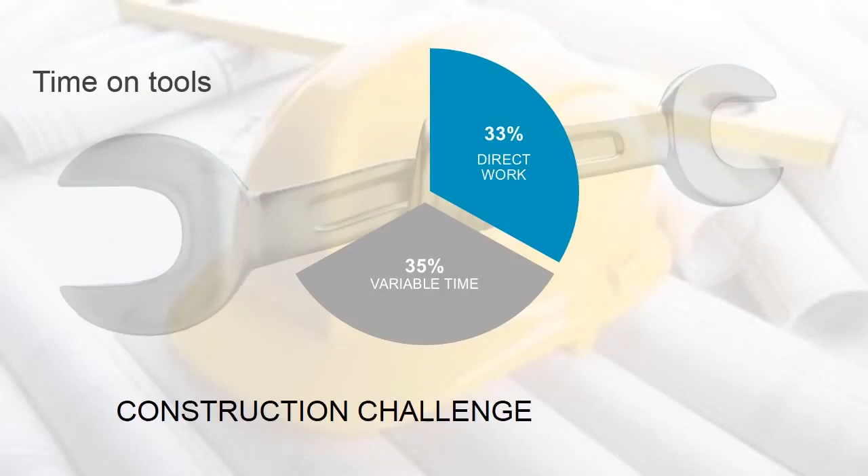Another third of the time is called variable time. Variable time is the time spent getting safety permits and training, moving material around, break times, and logistics to and from the job. Variable time may change from job to job or client to client. Disturbingly, another approximate third of all construction personnel time is spent idle and waiting. Constructors want to know how they can improve and shorten project schedules and turn idle time into profit.

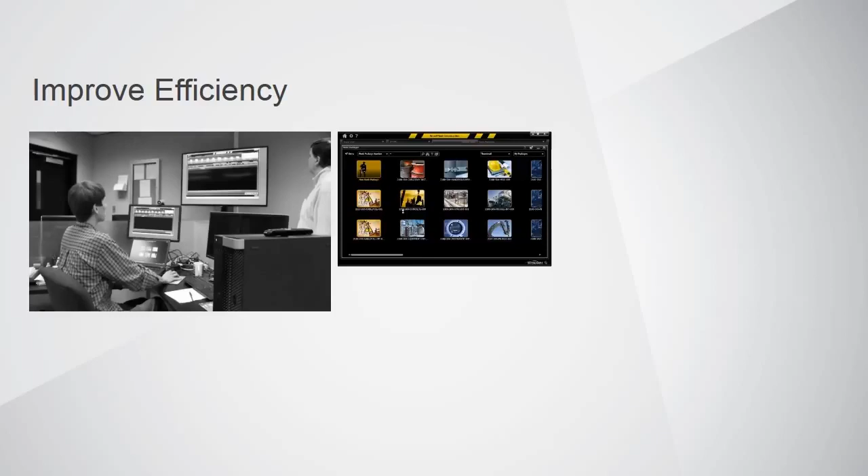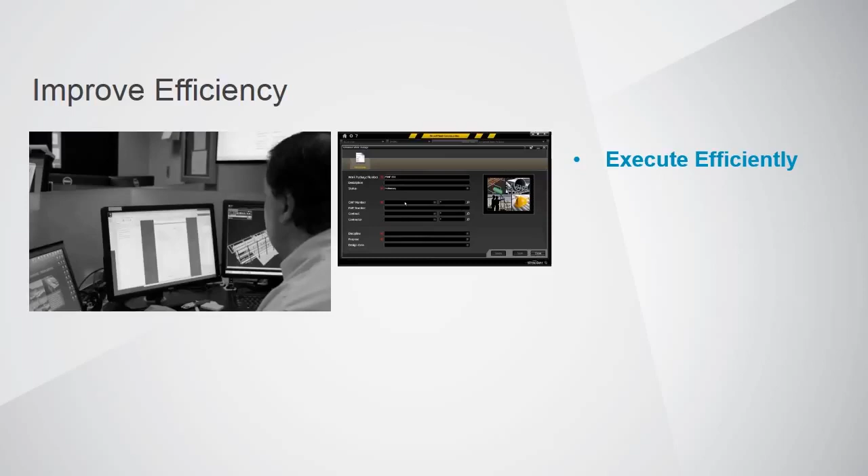Intergraph has been working with many constructors around the world to get a view of what it takes to improve efficiency of execution. Executives tell us they need to execute efficiently day to day. In order to execute efficiently, the work crew needs to have information, materials, tools, and resources in the right place at the right time. Without that basic capability, efficiency is extremely difficult to improve.

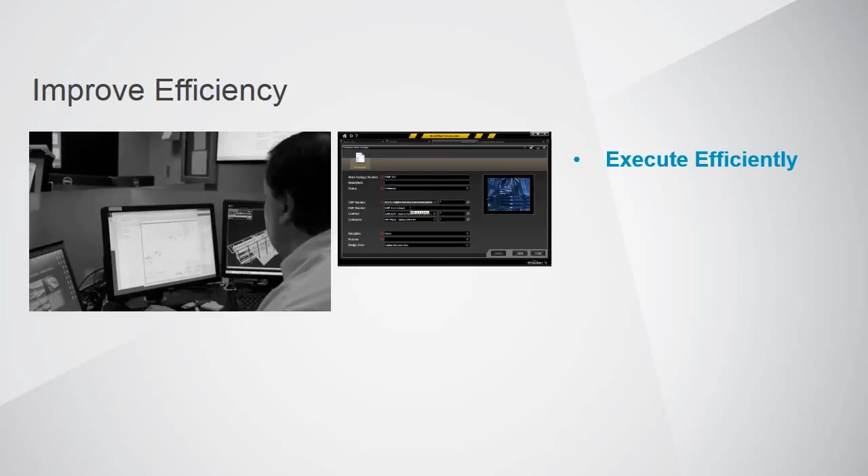Things happen in construction. Materials don't arrive, materials are mislabeled, equipment breaks down, and employees don't show. It's imperative that the on-site crews be able to dynamically optimize to make sure they're making the best use of resources available to reduce idle and wait time.

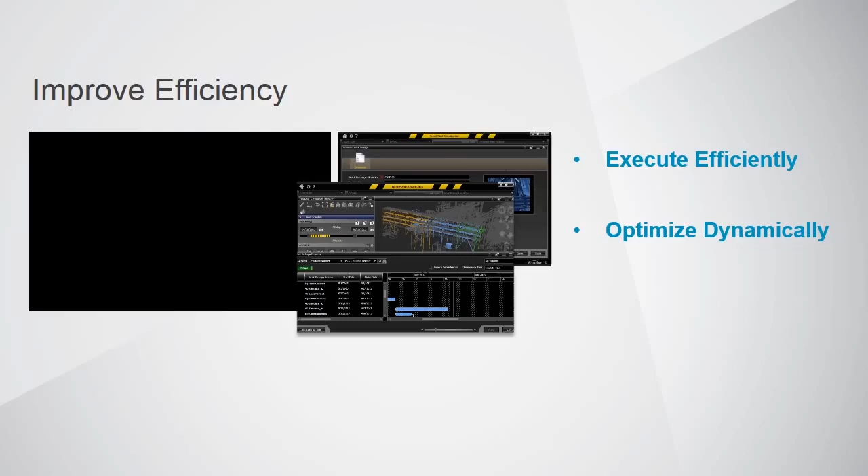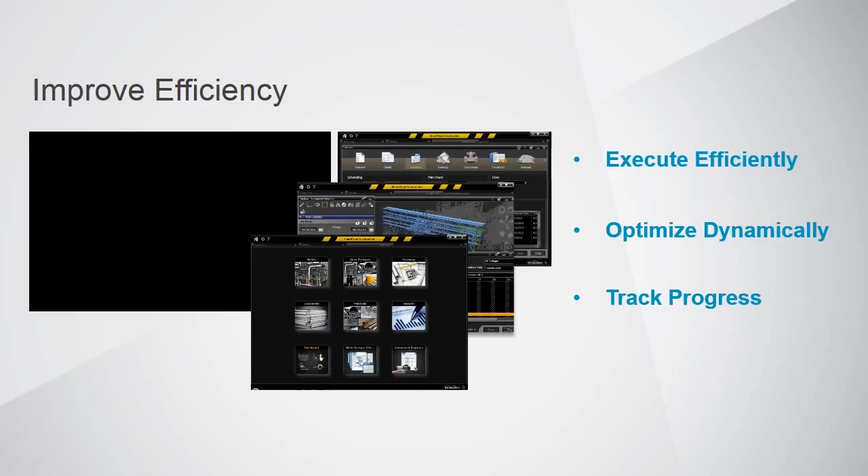Tracking progress is a critical part of improving efficiency. Progress tracking is important in two ways. Constructors are paid on some basis of progress. Also, without an accurate view of progress, an executive can have a false sense of security about the project until it's too late to make changes.

Documentation is also important in construction to improve efficiency. Having organized standard documents at the end of the construction project is helpful. SmartPlant Construction helps construction crews by pulling all of the documentation together in one place in a simple, easy-to-use format.

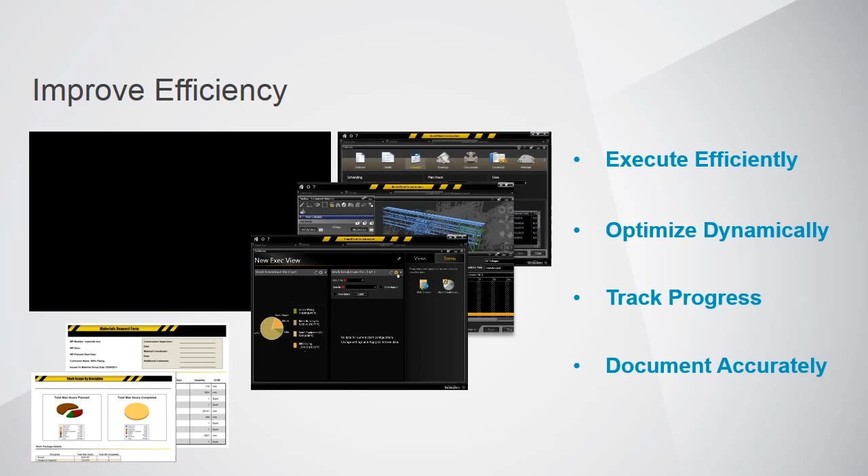It's one thing to talk about the technology concepts, but what happens in reality? Since the launch in 2009, how many people are really doing this? The results show interest across all industries and around the world.

This news has been encouraging, and the process industry has seen many clients who have engaged SmartPlant Construction to improve construction. The mining industry has also seen how they can improve efficiency and ensure delivery of their capital investments with SmartPlant Construction. The power industry may seem simplified, but also has similar idle and wait time problems as the other industry construction projects. Due to these problems, power industry contractors have also begun to focus on SmartPlant Construction.

Offshore and marine is no different. It's a very basic concept: getting all the right resources, people, materials, and process at the right point and the right time so that people can execute efficiently. Fluor, one of the largest constructors in the world, is a great example of a company engaging on SmartPlant Construction in order to streamline their execution and improve their execution efficiency.

In offshore marine, clients like SapuraKencana have engaged with SmartPlant Construction to ensure the efficiency of their yard operations so they have less idle and wait time and become more efficient at executing their projects for their clients.

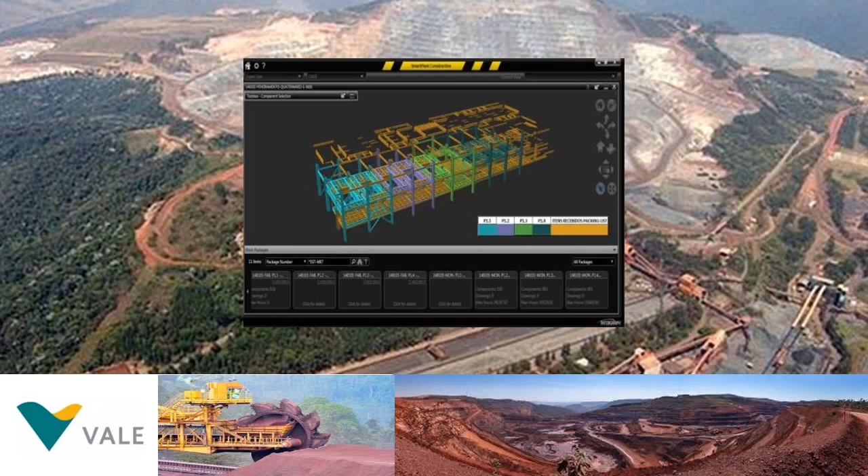However, it is many, many miles away from any highway, road, or dock, so this actually turns out to be a rail project. This is a very exciting project because it's going to be a truckless mine. All materials will have to be transported several hundred kilometers to the dock by using shovels, conveyors, and rails.

In order to ensure that the railway project finishes on time and construction goes effectively, it requires Intergraph to plan in detail by rail segment. This is called the S11D Logistics Project. It involves over 700 kilometers of railway that have to be put in place in order to make this project work.

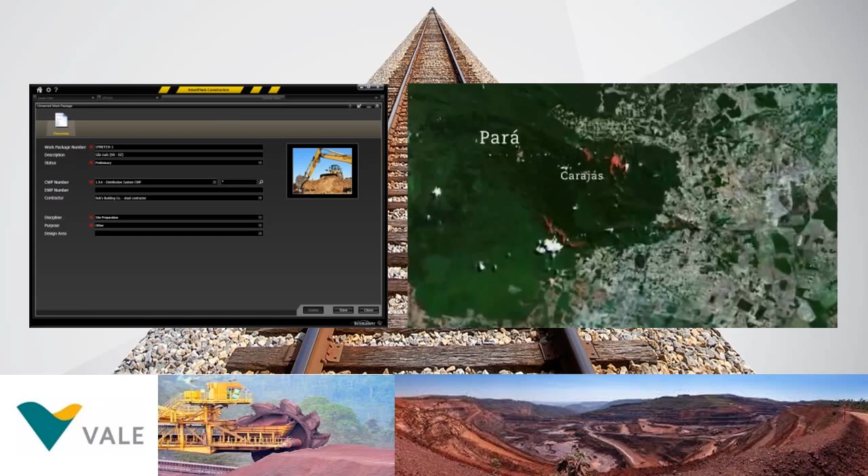So they have railway all the way from the truckless mine site to the port, where they will eventually load and sell the iron ore that is being produced. All of this work is being done and planned with SmartPlant Construction.

It's a massive iron project with a value of approximately $20 billion. When complete, it will be one of the most impressive iron ore mines in the world as a result of the truckless technology they are deploying.

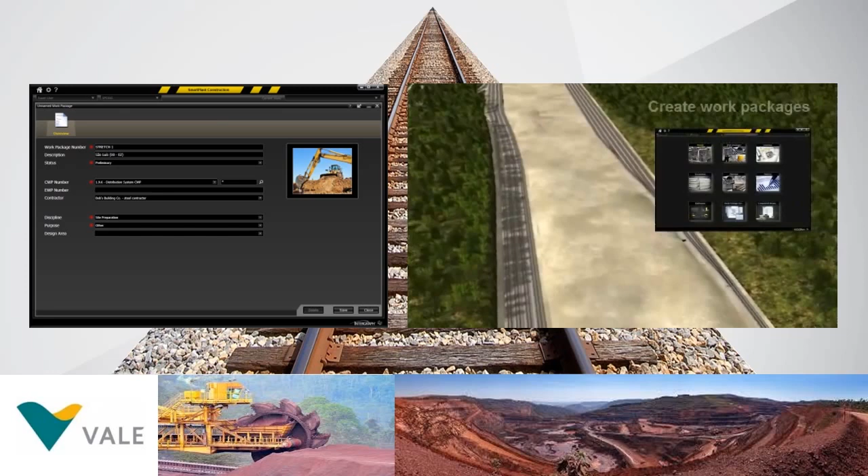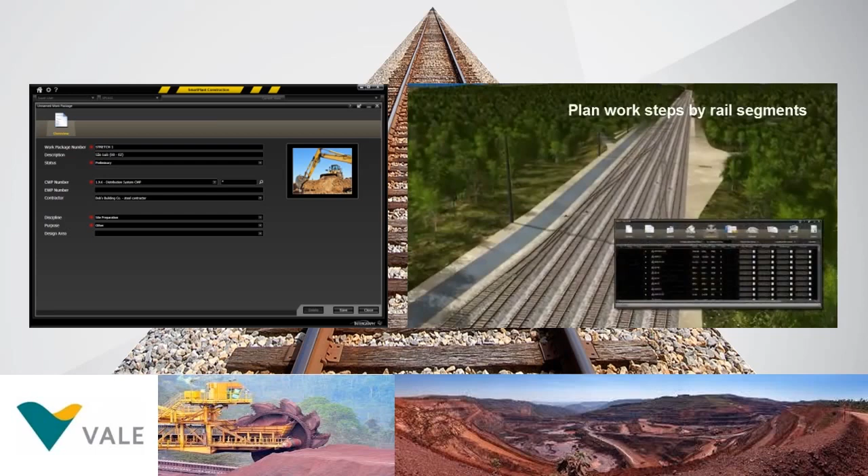This project is being completed with SmartPlant Construction, and they're planning by rail segment to ensure that the right people, the right material, and the right tools are available at the right time. Because they are operating out in the middle of the jungle, it is critical that they show up at the job site with every single thing that they need and ready to work.

Otherwise, they will have idle and wait time. Luis Andrada said it best when he talked about how Intergraph worked with them and SmartPlant Construction. They really see that this is a critical piece of their work process to ensure effective delivery of that project. And we are very proud to be working with such an aggressive, innovative company like Vale.